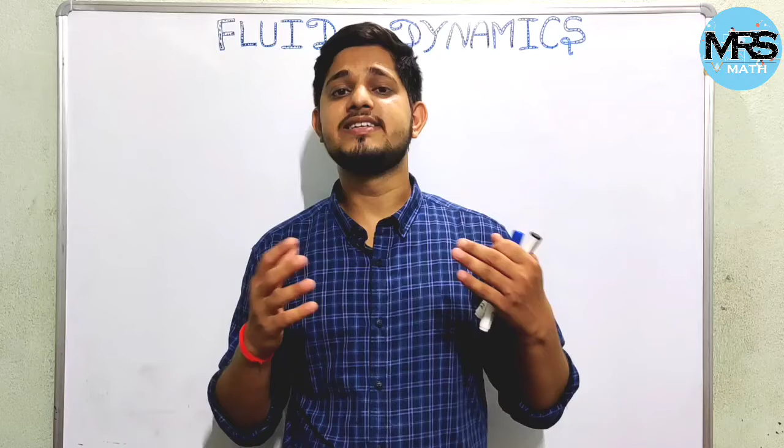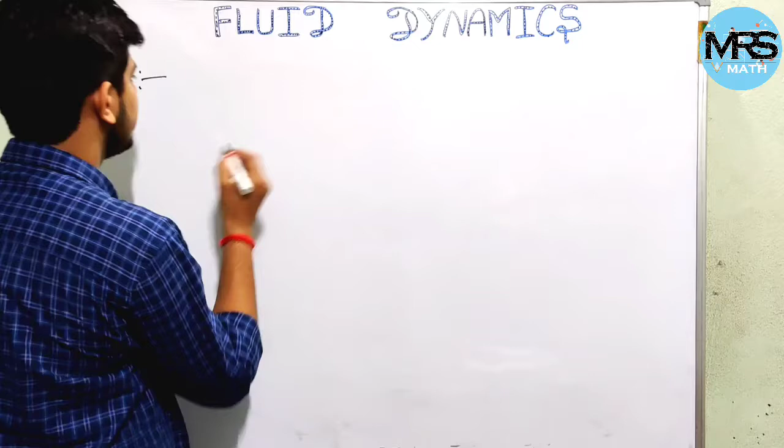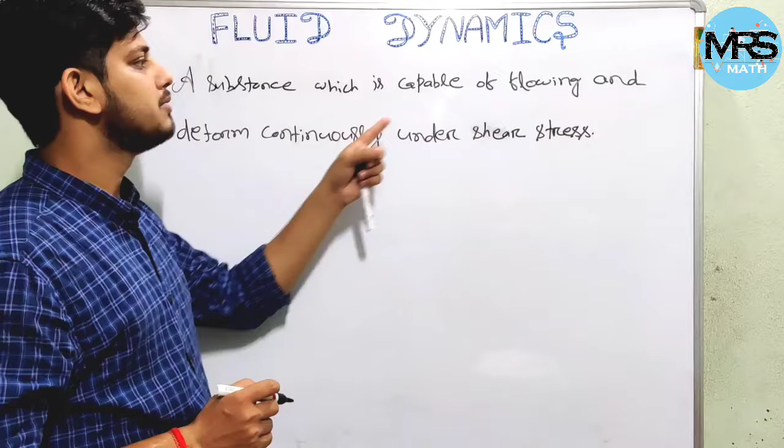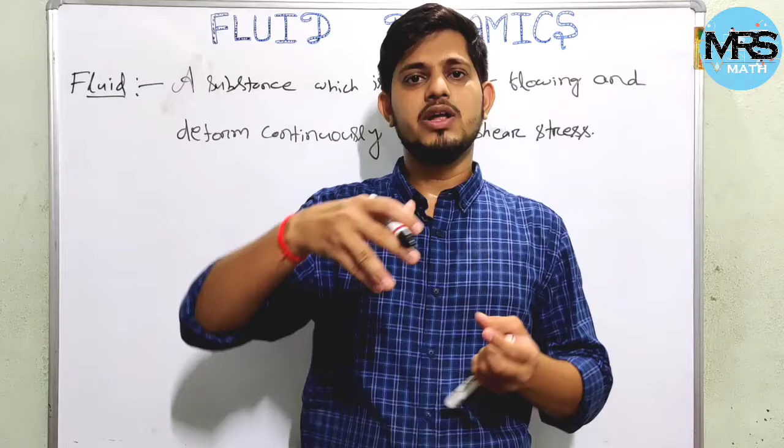But we don't have the exact knowledge or exact idea about fluids. Many of us think that fluid means which can flow, and many of us think that fluid means only liquid, which is not exactly correct. Okay, so let us come to the definition of fluid. Write down the definition. A substance which is capable of flowing and deforms continuously under shear stress. For example, if you take a bucket full of water and apply force in this way, then it will continuously deform its shape. So water is the best example of fluid.

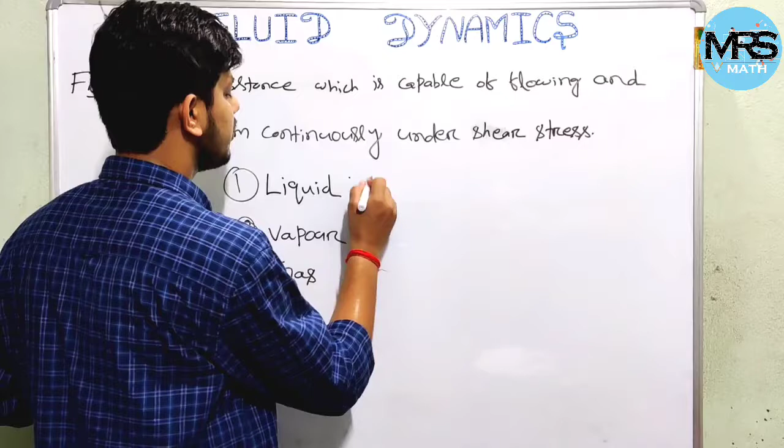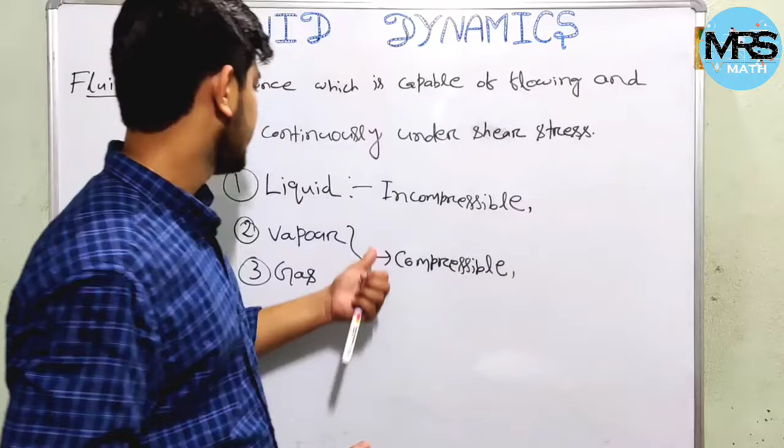So in general there are three types of fluid. One is liquid, the second one is vapor, and the third one is gas. Liquid is incompressible, but vapor and gas are compressible. And if we talk about the molecules, in liquid the molecules are very close to each other, but in case of vapor and gas, molecules are present in an open space.

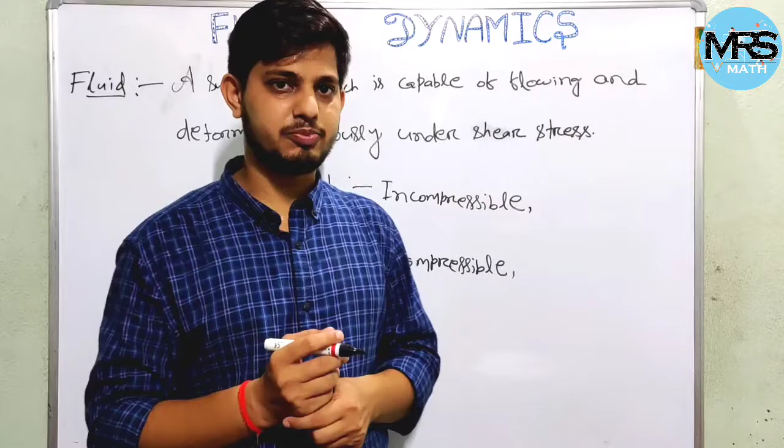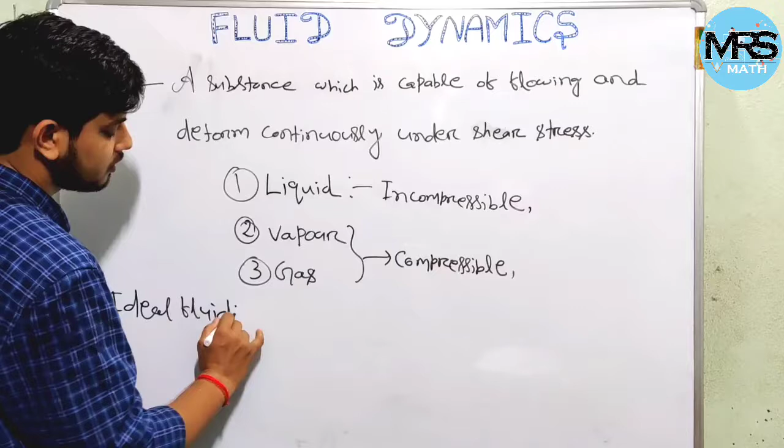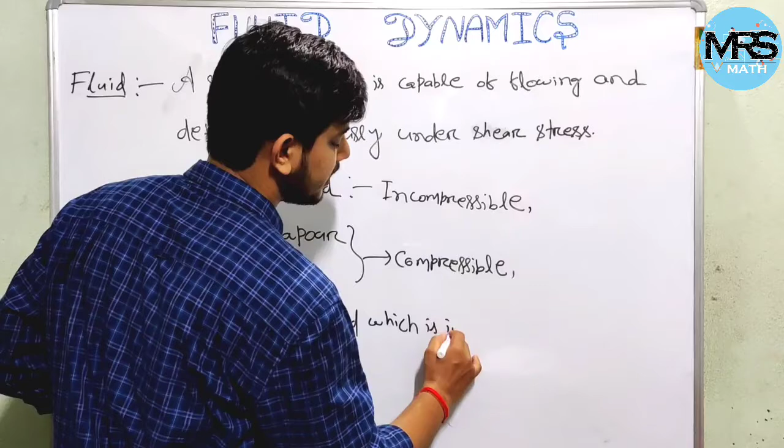So in general we can define fluid in this way, but if you see the property of fluid, then we can categorize fluid in two ways. One is ideal fluid. Ideal fluid means the fluid which is incompressible and having no viscosity. No viscosity means whether you apply force or not, its flow will not stop. It will flow continuously, which is not possible, right? So this type of fluid does not exist in real life.

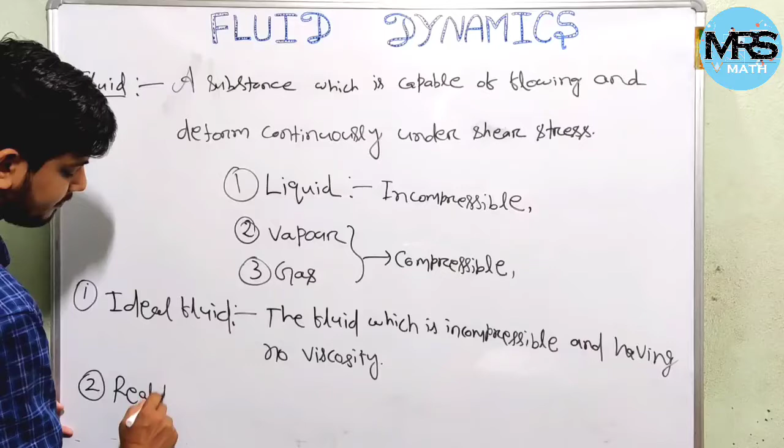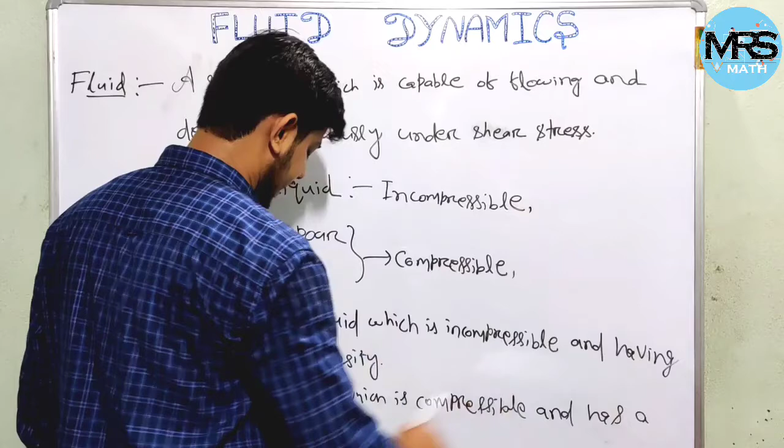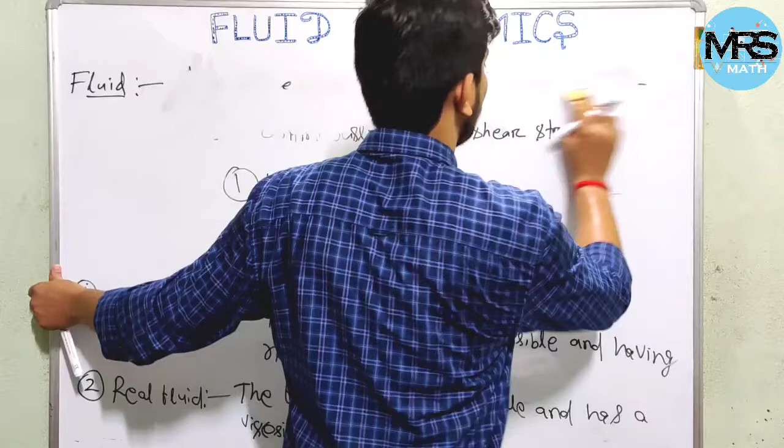The second one is real fluid. The real fluid is the fluid which is compressible and has viscosity. That means you can take water, which is slightly compressible and has viscosity. Again, real fluid is defined in two ways, that is Newtonian fluid and non-Newtonian fluid.

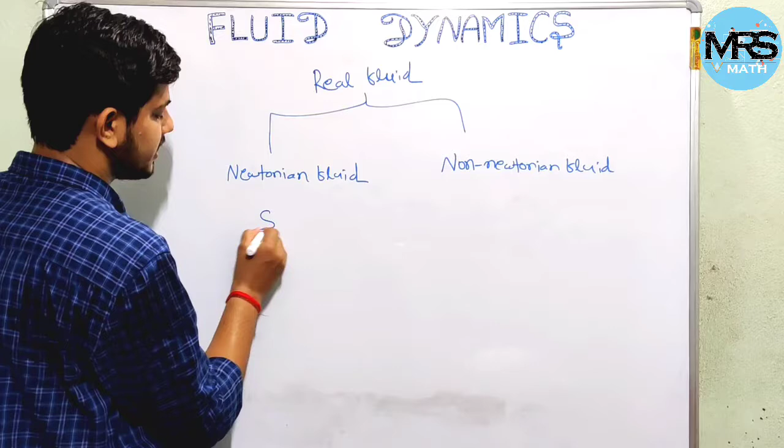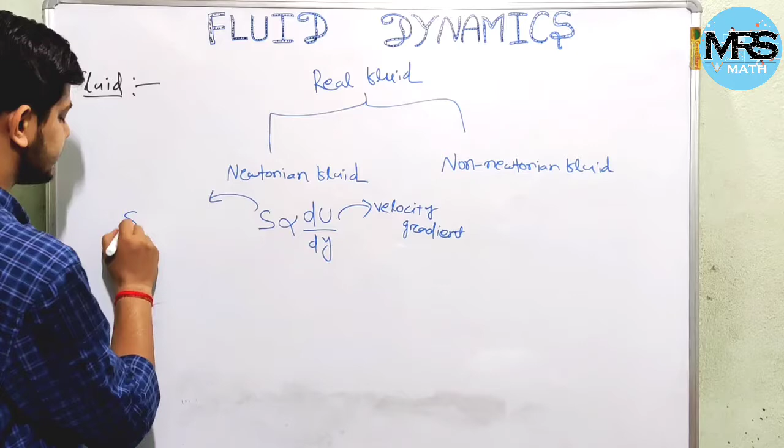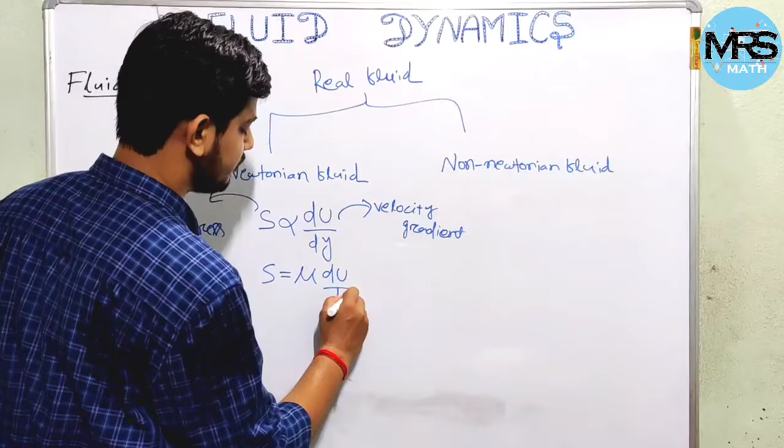So what is Newtonian fluid? Newtonian fluid means the fluid which obeys Newton's law, right? That is, shear stress is directly proportional to du/dy, which is the velocity gradient. So if you remove this proportional sign, then you can write some constant mu into du/dy, where mu is the coefficient of viscosity. This viscosity plays an important role in fluid dynamics. That's why I will discuss viscosity briefly in one class.

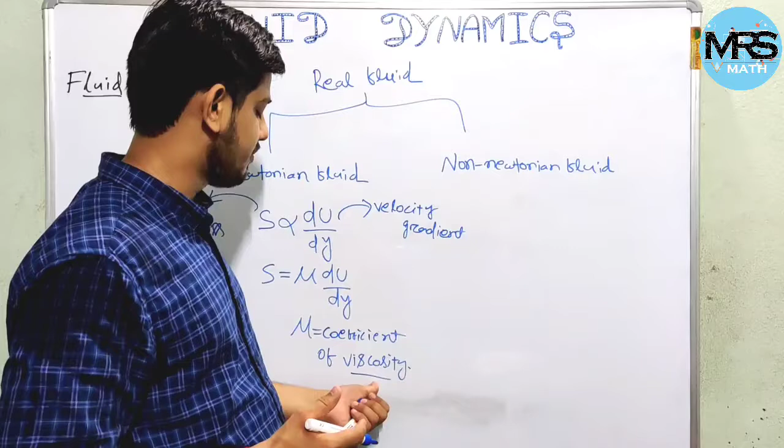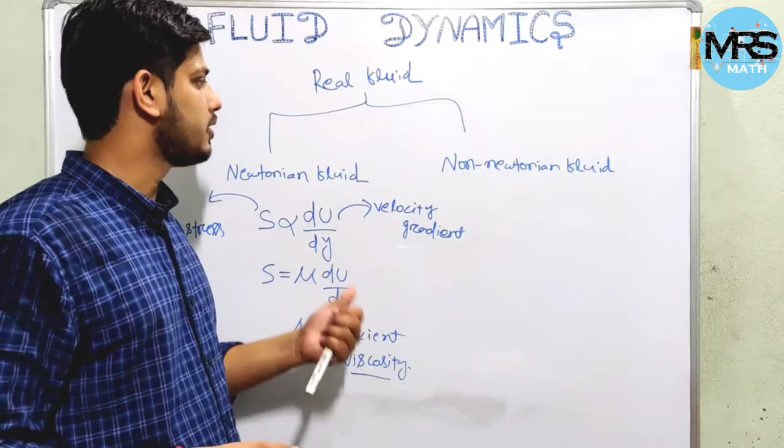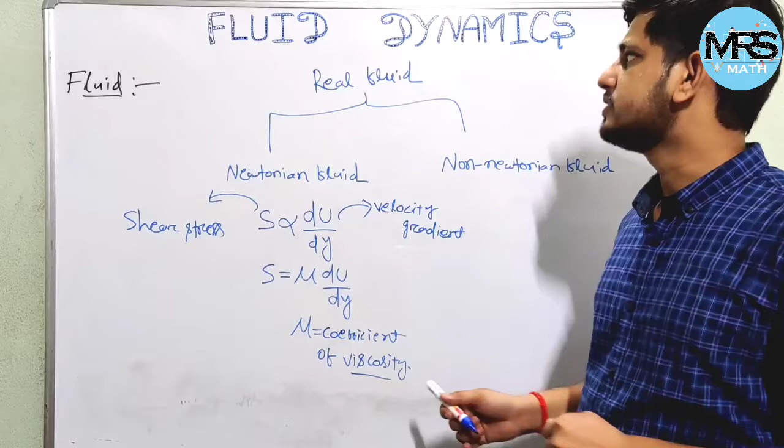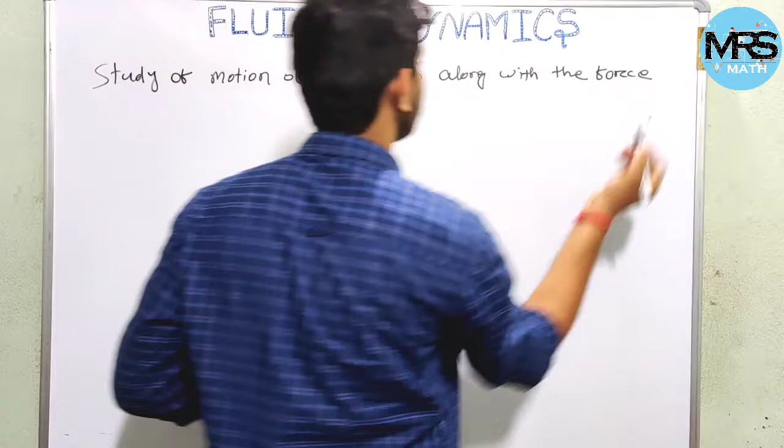Similarly, non-Newtonian fluid is the fluid which does not obey Newton's law. Water is the best example of Newtonian fluid, and gel is an example of non-Newtonian fluid. So this is about the fluids. Now come to fluid dynamics. What is that? It is the study of motion of fluid flow along with the force causing the flow. This is nothing but fluid dynamics.

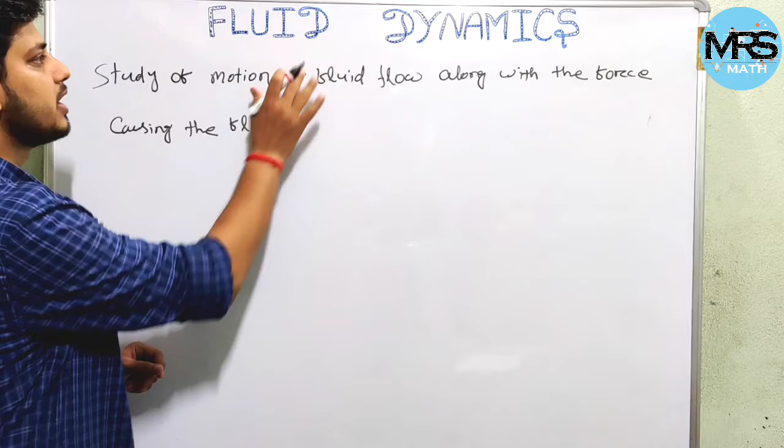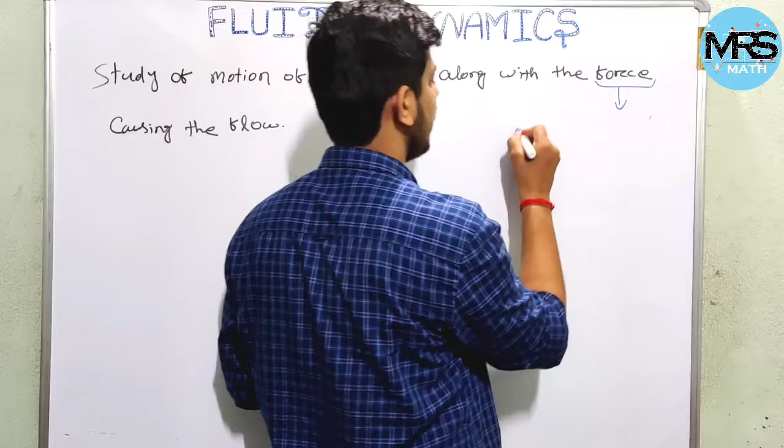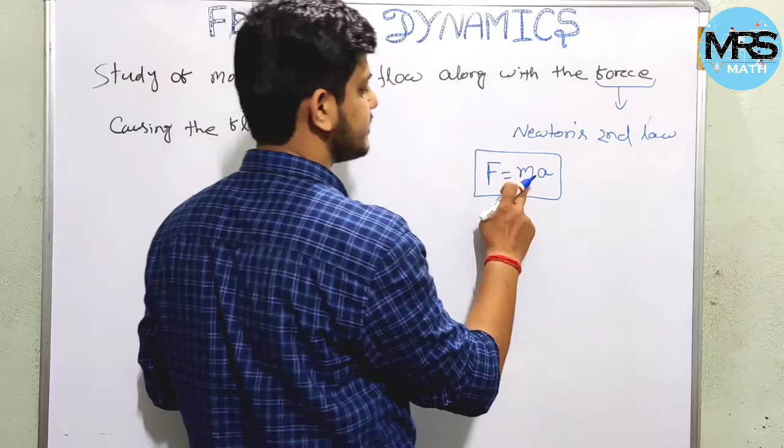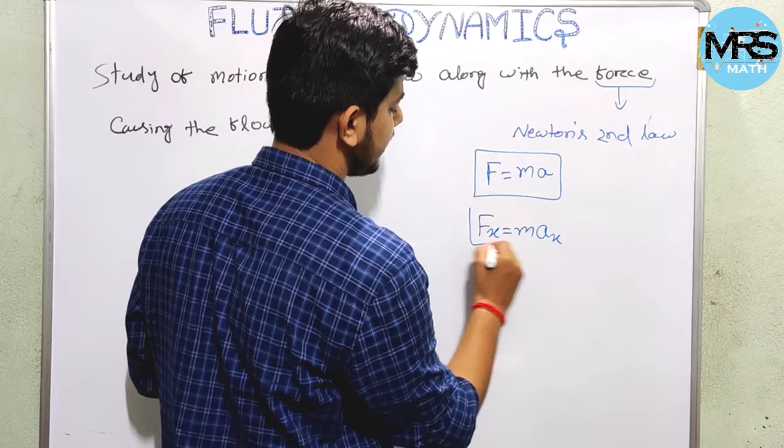So this force we will calculate based upon Newton's second law: F is equal to m into a. This F is the resultant force or net force, m is the mass of the fluid, and a is the acceleration of the fluid in the direction of force. If we assume the force in the x direction, then we can write Fx equal to m into ax. So there are 5 types of forces acting on a flow. Let us discuss these types of force.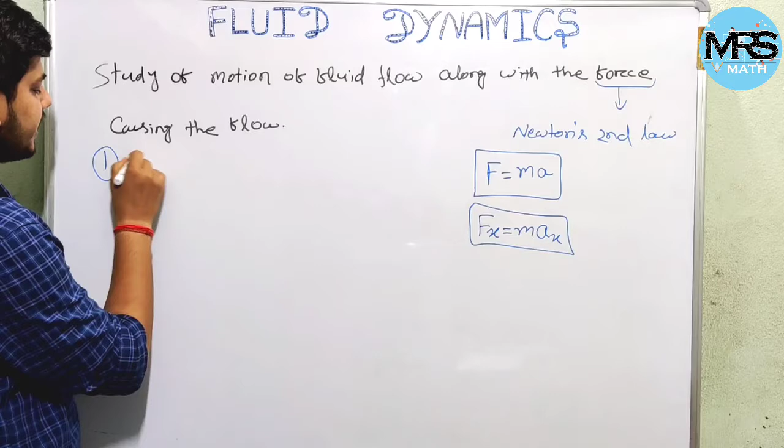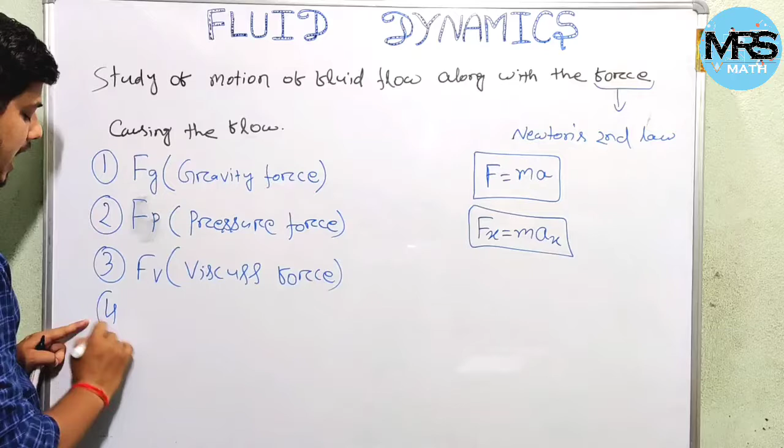The first one is Fg, that is gravity force. The second one is Fp, that is pressure force, meaning force due to pressure. The third one is Fv, that is viscous force, meaning force due to viscosity. This is one of the important terms; I'll discuss it later. Next is Ft, that is force due to turbulence.

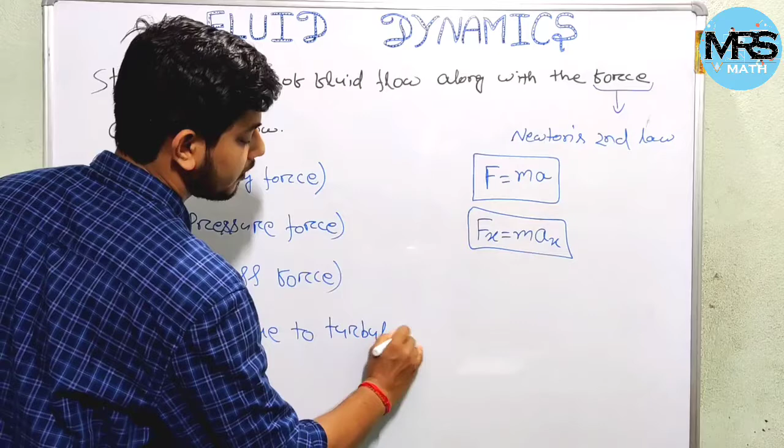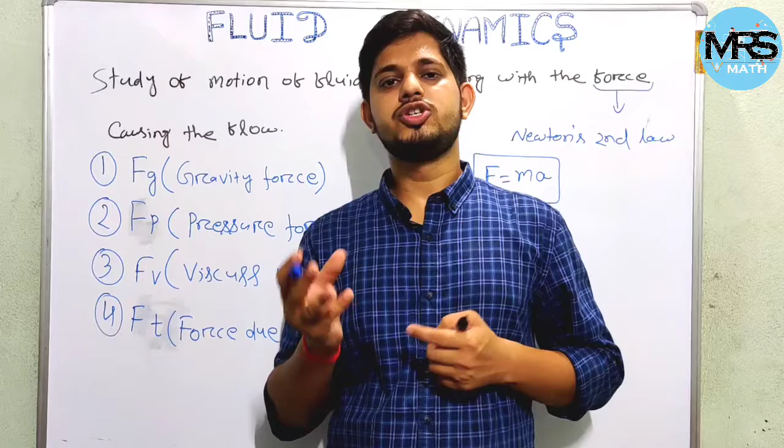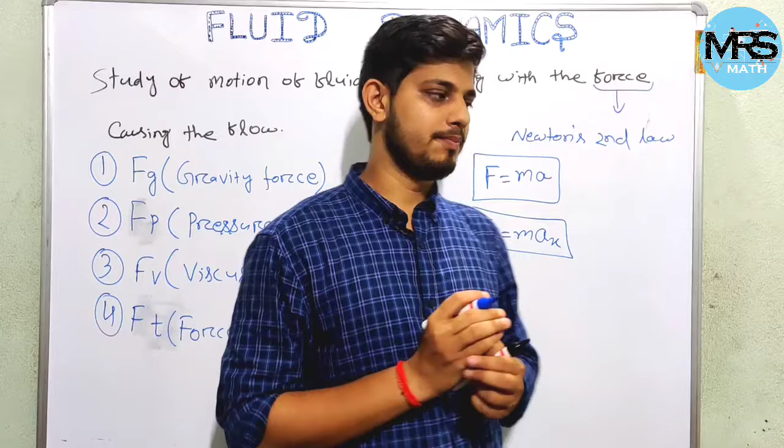What is this turbulence? When the flow is flowing at a very high velocity, the particles present in the fluid start to jump randomly from one plane to another. This is nothing but turbulence. But in a similar case, if the flow is flowing in a line, smoothly, without jumping from one plane to another, then the flow is called laminar flow or streamline flow. So that is force due to turbulence.

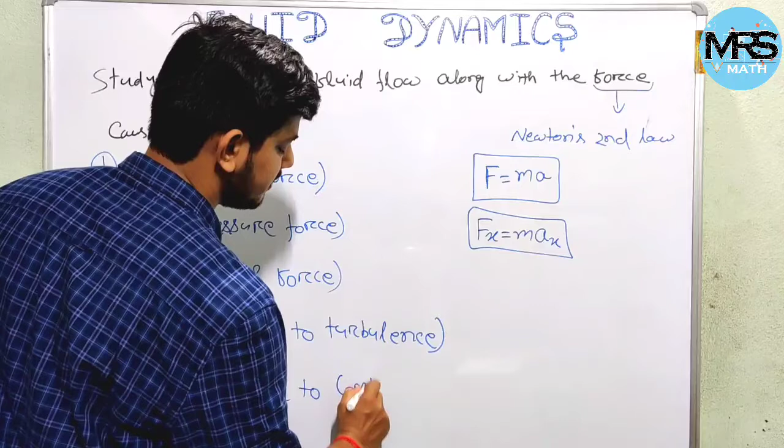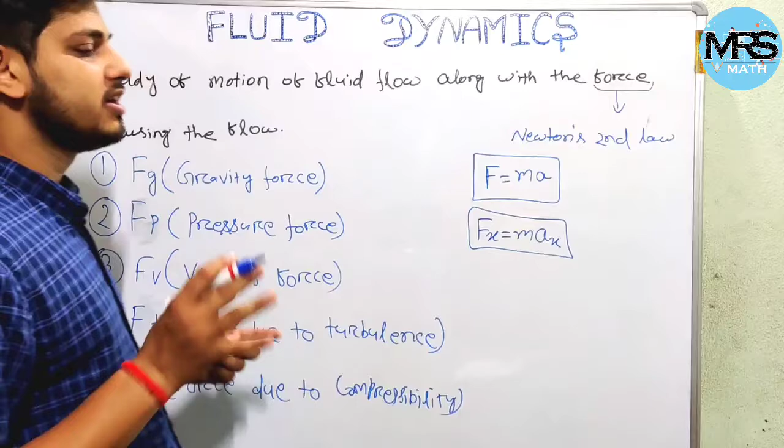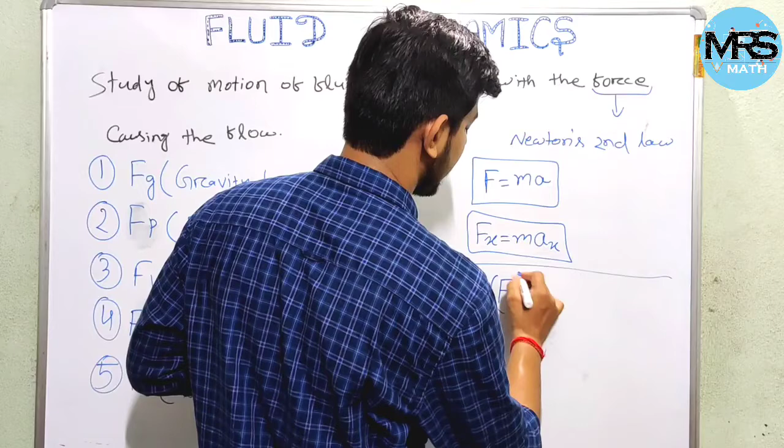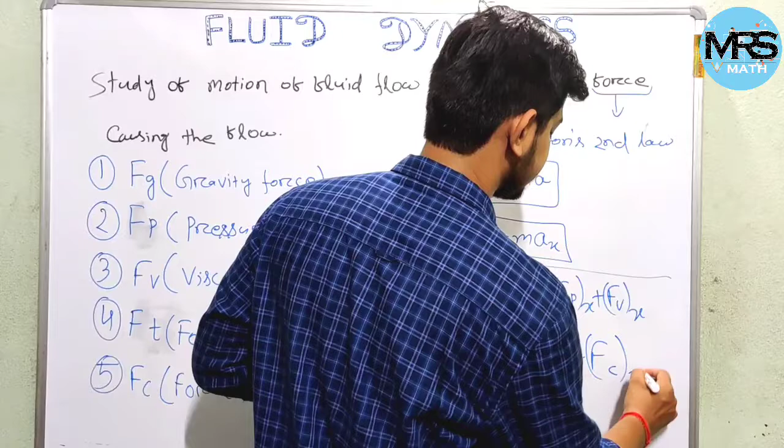Now come to the last one, that is force due to compressibility, Fc. So these 5 types of forces act on a fluid flow. If we combine them together, we can write Fx equal to Fgx plus Fpx plus Fvx plus Ftx plus Fcx. And this is the general form of the force acting on a fluid flow.

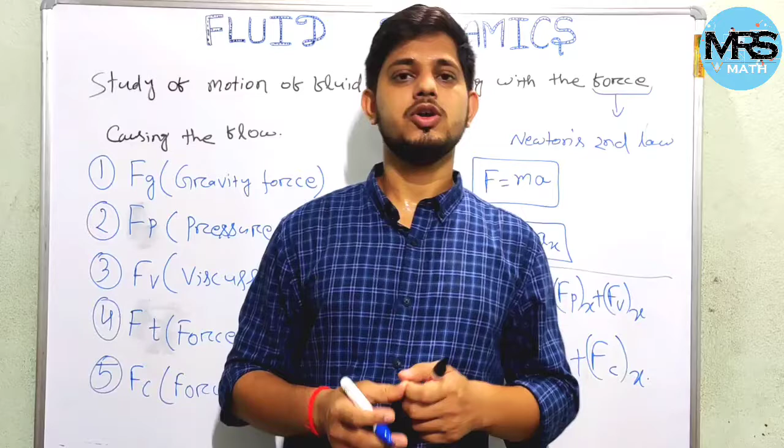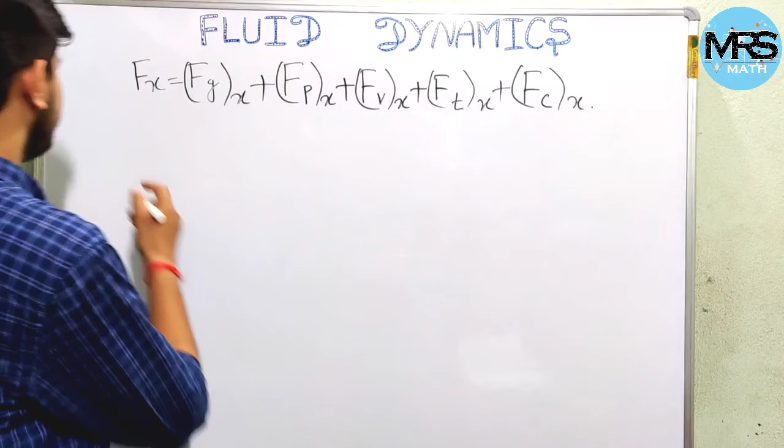So from this general equation we can derive many equations which are important for fluid dynamics. Let us derive them one by one. First, if you neglect Fcx, that means force due to compressibility, then from here we get the Reynolds equation.

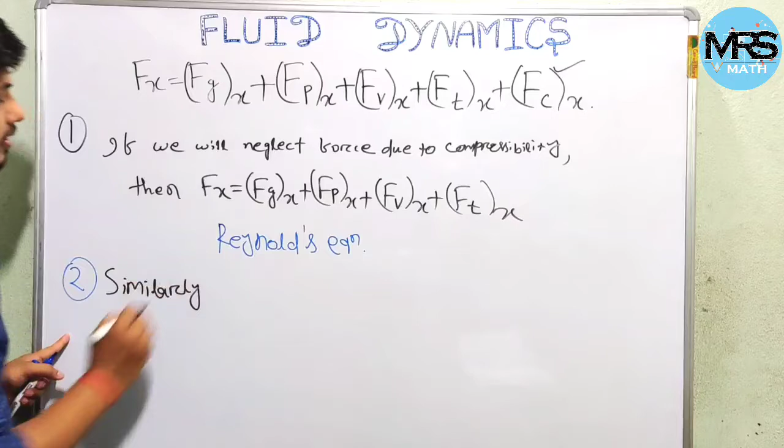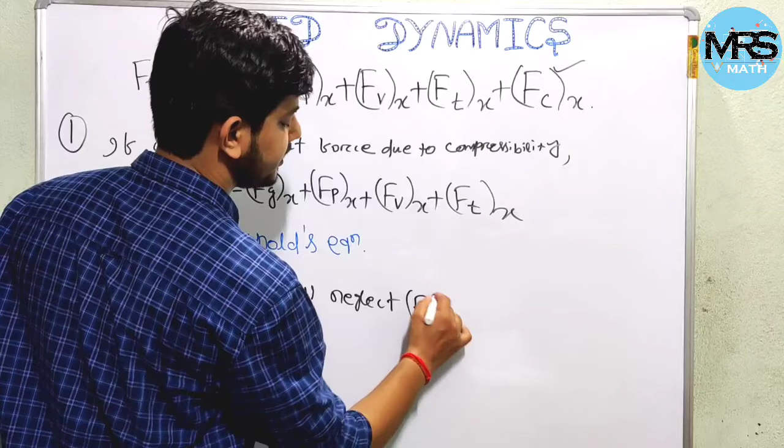Similarly, if we neglect these two forces, that is Ftx and Fcx, then Fx will be Fgx plus Fpx plus Fvx. Neglecting Ftx and Fcx, we get Fx in this form, which will give us the famous Navier-Stokes equation.

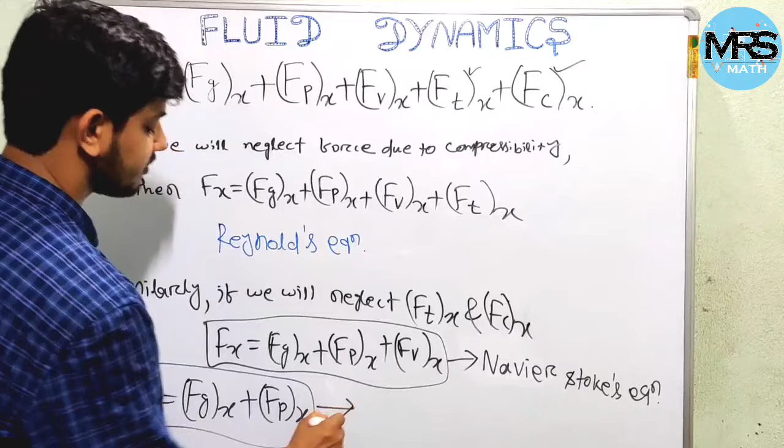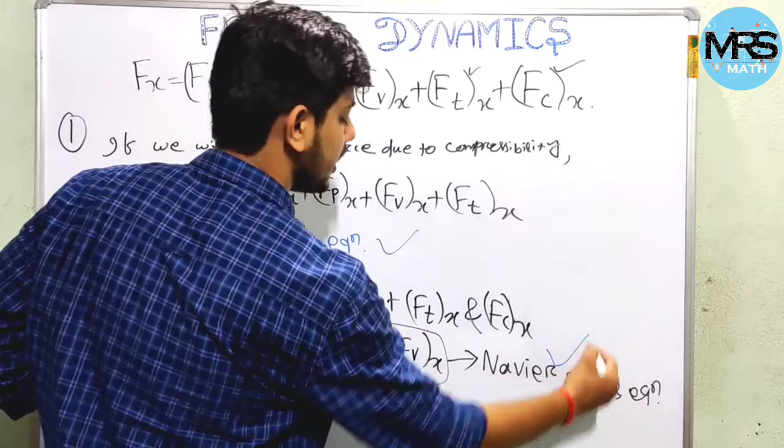And the third one: if we consider only these two forces, that is Fx equal to Fgx plus Fpx, this will give us the important Euler's equation. So these three equations are the most fundamental equations for fluid dynamics. How we get this Euler's equation, I will discuss in the coming class.